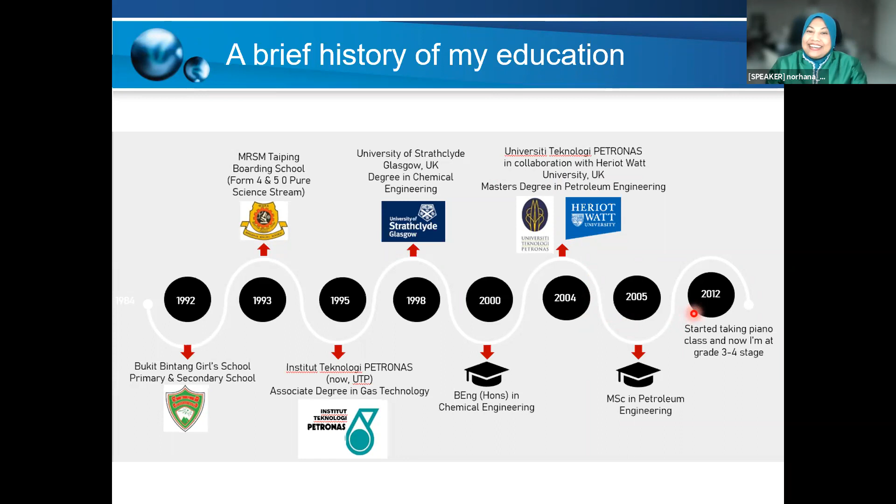And then half a year later, it was full-time at the campus itself. So I graduated with a master's in petroleum engineering from UTP. And since then, the only lesson that I'm taking right now is piano class. And just to let you know, I started in 2012 and I'm now in grade 3 or 4 stage.

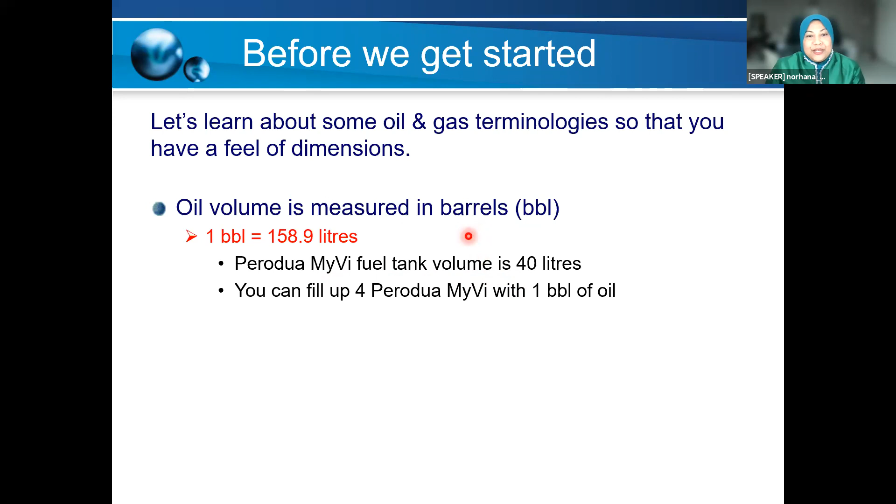So how much really is 1 barrel of oil? 1 barrel of oil is about 158.9 liters. So if you're familiar with the car Perodua Myvi, typically it has a fuel tank volume of about 40 liters. So with 1 barrel of oil, you can actually fill up 4 Perodua Myvis. Yeah. So what about gas?

Okay, gas volume is measured in standard cubic feet. And 1 standard cubic foot is about 28.3 liters. So if you know, in Kuala Lumpur we typically have a 60-liter natural gas vehicle tank, or NGV tank. So you can fill up 1 taxi with 2 standard cubic feet of gas.

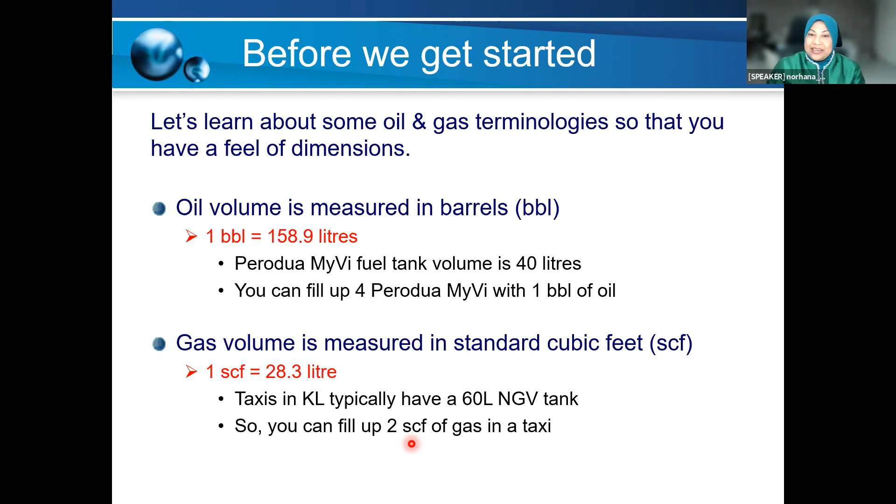So that's what it feels like to have 1 barrel of oil and 1 standard cubic feet of gas, right? So now that you know what barrels and standard cubic feet are in oil and gas world, I'm gonna now move into the topic of introduction to petroleum engineering and its sub-disciplines.

I have shared with you life as petroleum engineers, and I would like to share with you some challenges in oil and gas industry. So bear with me over the next 20 minutes or so. I'll walk you through all the slides. To make things more interesting, I've prepared or sourced a video that speaks about the oil and gas industry. So I'm gonna play this video now. Let's see if it works.

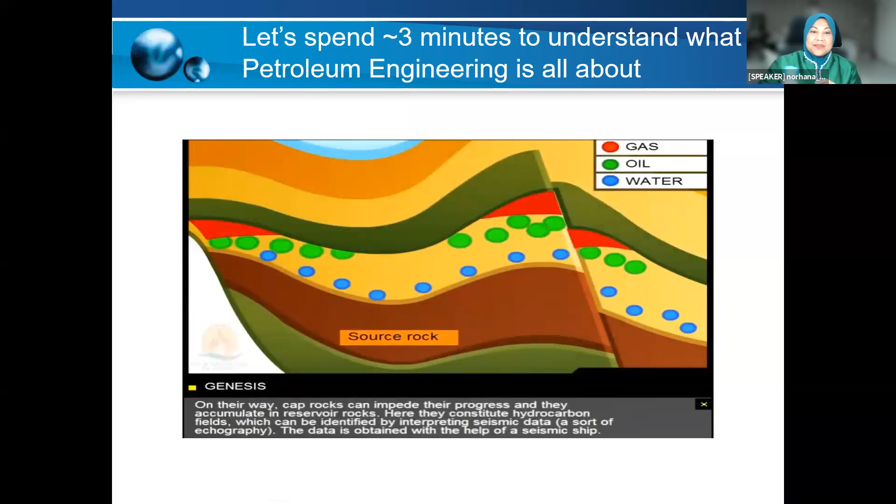Oil and gas are generated from a source rock, organic matter buried in the depths of the earth. Once formed, they climb back towards the surface. On their way, cap rocks can impede their progress, and they accumulate in reservoir rocks. Here, they constitute hydrocarbon fields, which can be identified by interpreting seismic data, a sort of echography. The data is obtained with the help of a seismic ship. To confirm the interpretations of seismic data, two types of drilling gear exist. Each is adapted to a range of depth of water down to more than 2,500 meters. The platform seen here is a semi-submersible which floats and retains its stabilized position by means of anchors fixed on the seabed.

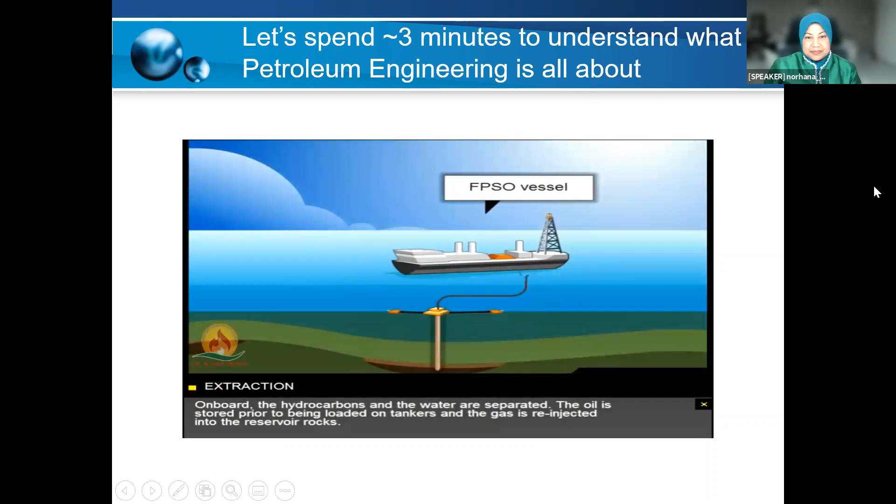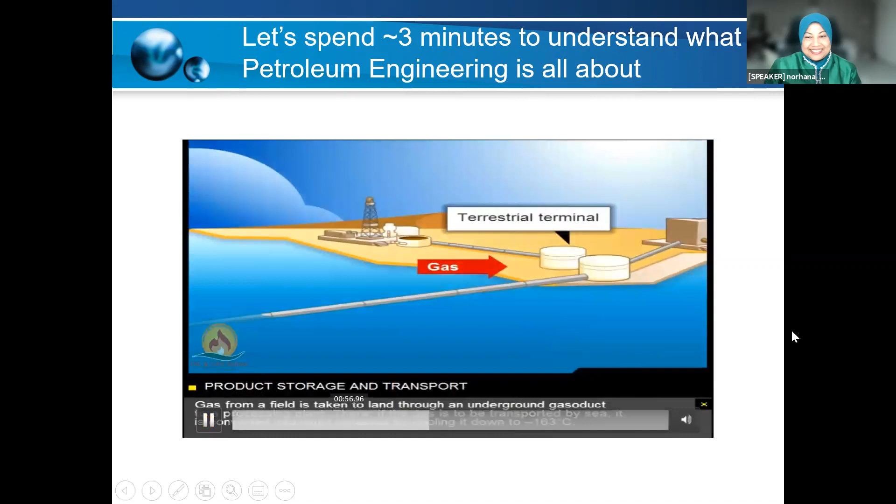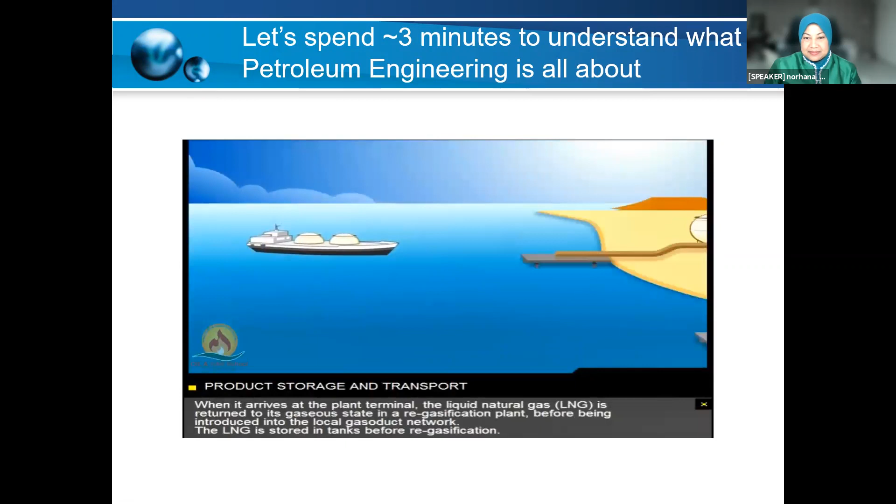Platforms at sea are used not only for drilling, but also for the production of hydrocarbons. This production consists of the separation of oil, gas, and water before the oil and gas is taken by pipeline towards a mainland terminal. Where it's impossible or too expensive to link the field to the coast by a pipeline, an FPSO ship is used, floating production storage and offloading barge. On board, the hydrocarbons and the water are separated. The oil is stored prior to being loaded on tankers, and the gas is re-injected into the reservoir rocks. Gas from a field is taken to land through an underground gasoduct to a processing plant. There, if the gas is to be transported by sea, it's converted into liquid, obtained by cooling it down to minus 163 degrees Celsius. When it arrives at the plant terminal, the liquid natural gas, LNG, is returned to its gaseous state in a regasification plant before being introduced into the local gasoduct network. The LNG is stored in tanks before regasification.

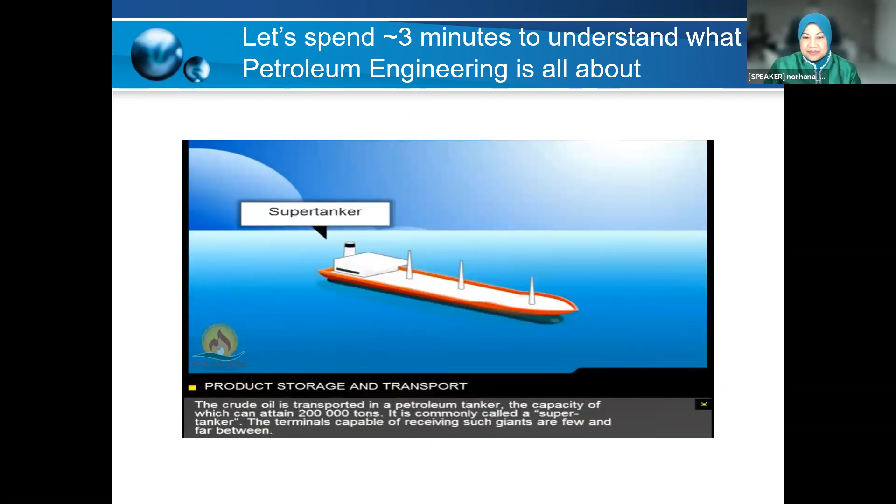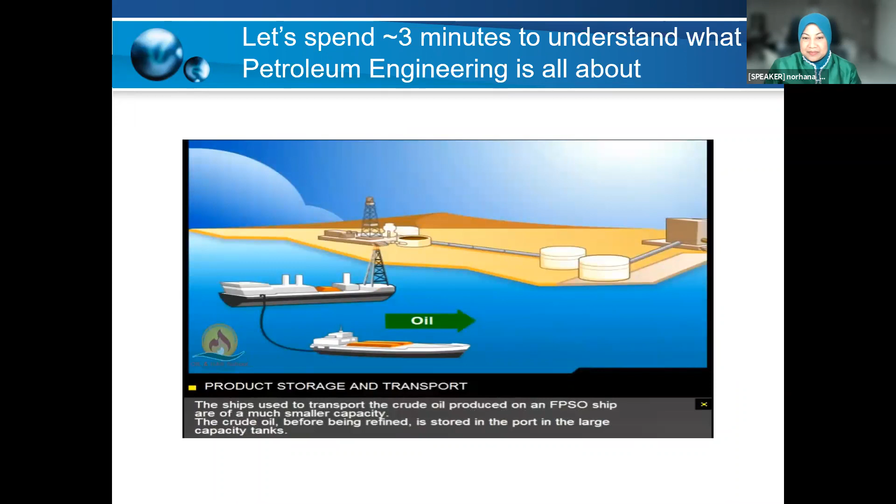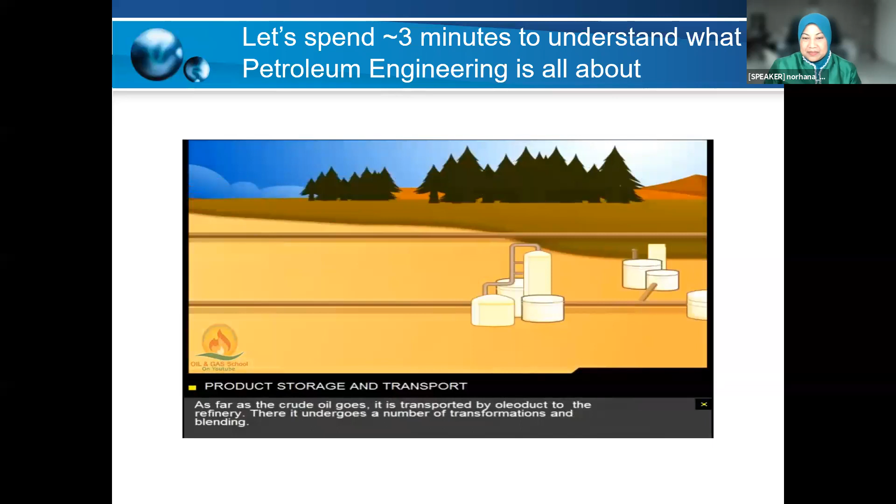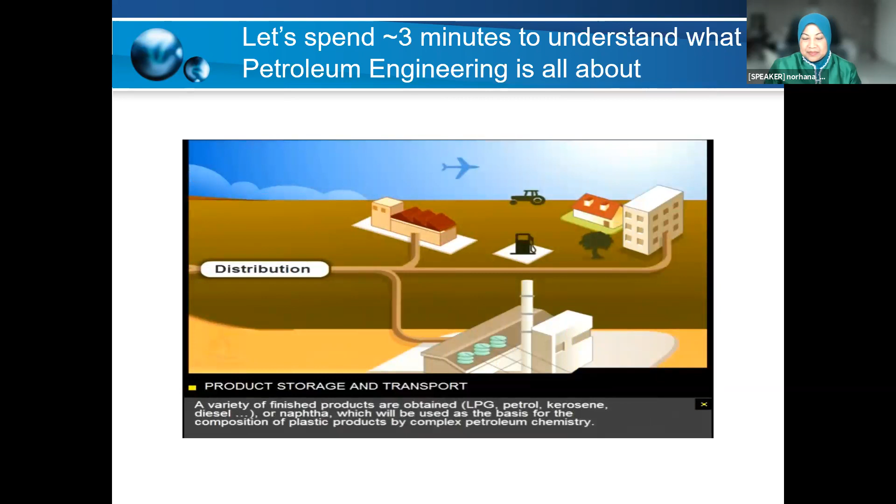The crude oil is transported in a petroleum tanker, the capacity of which can attain 200,000 tons. It's commonly called a supertanker. The terminals capable of receiving such giants are few and far between. The ships used to transport the crude oil produced on an FPSO ship are of a much smaller capacity. The crude oil, before being refined, is stored in the port in large capacity tanks. The natural gas is preserved in reservoirs, artificial or natural. It's ready to be injected by pumping into the gasoduct network for industrial and domestic use, or as fuel in power generating stations. As far as the crude oil goes, it's transported by oleoduct to the refinery. There it undergoes a number of transformations and blending. A variety of finished products are obtained: LPG, petrol, kerosene, diesel, or naphtha, which will be used as the basis for the composition of plastic product. Two types of drilling gear exist.

So sometimes what we get is just gas, and sometimes what we get is a combination of gas and oil presence. Sometimes gas are captured in tight gas sand. And in the shallower surface in some parts of the world, we have gas in what we call coal, and they cover an extensive area, and we call them coal bed methane, particularly because they have high concentration of methane gas. Right.

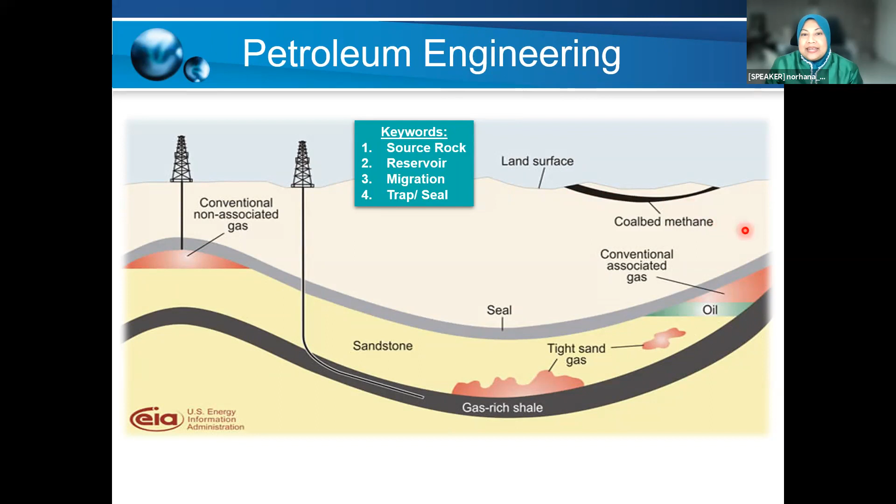So typically, as petroleum engineers, we are involved in what we call the field life of a petroleum engineering world. So we can start the activity with acquisition, exploration, development, production, as well as abandonment. We can be onshore and we can also be offshore. And offshore, we can work at shallow water conditions. We can work in deep water conditions. And we also can work in ultra deep water conditions.

Right. Of course, with increasing levels of water depth, the degree of technical complexity also increases. More and more advanced technologies are being used for us to explore and exploit the oil and gas offshore. So typically in shallow waters, we use a fixed platform or a compliant tower. So in the Malaysian environment, in our shallow waters, we typically have fixed platforms.

And in slightly deeper water, as we move out of the continental shelf towards the deepest part of the continent, we get varying types of rigs that we use. We have SeaStar, we have floating production systems. There are tension leg platforms. There are also subsea wellheads that we can connect to either one of these facilities. And we also have what we call a spar platform.

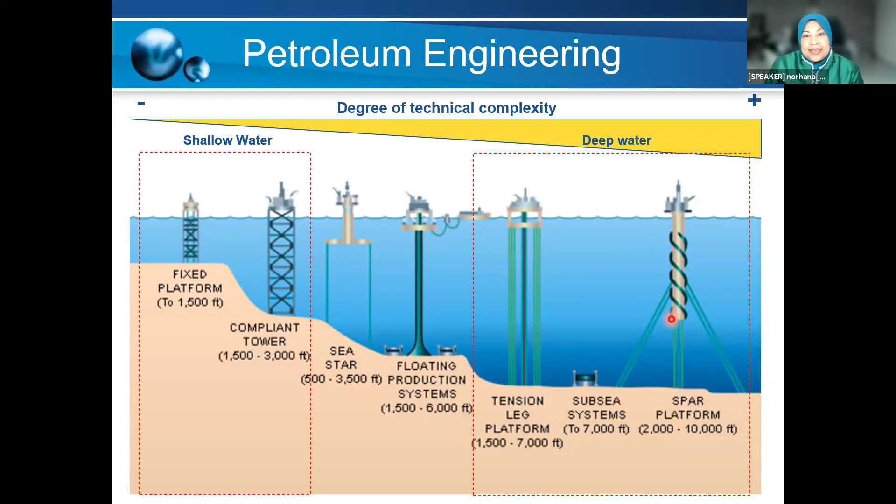Right, so for your information, there are many branches of petroleum engineering. So if you graduate with a petroleum engineering degree, you can be employed as a reservoir engineer, which I will talk about later. If you graduate with a PE degree, you can also be a production technologist. We also have petrophysics, and we also have drilling engineering, as well as petroleum economics.

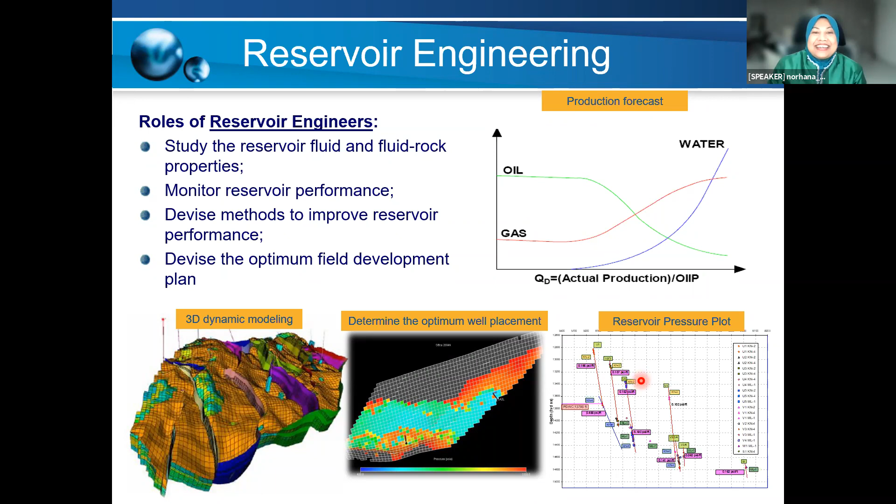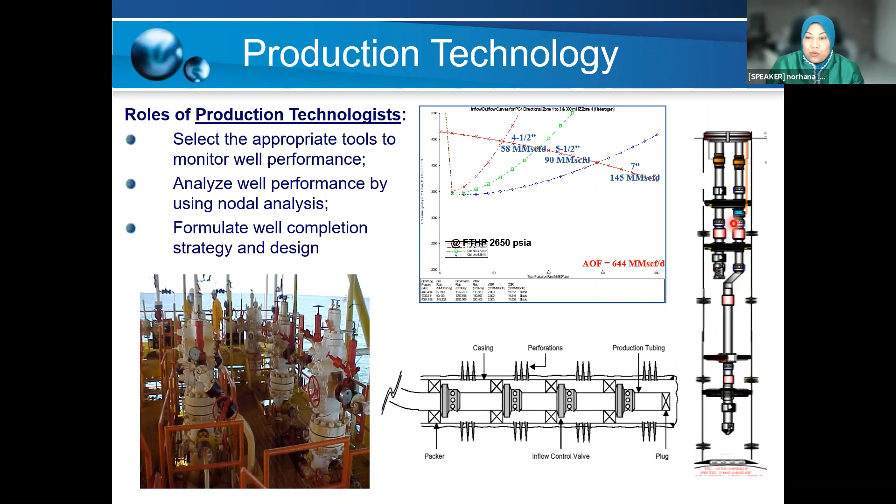So a production technologist will decide what type of equipment, what kind of perforations we're going to use, what kind of liquid we are going to produce, and how we manage them over time. So sometimes we are required to work in an integrated way.

So we do have integrated operations where we rely on satellites to transmit data from the drilling rig to our remote shore-based facilities. So it may be in the PETRONAS Twin Towers, or it may be anywhere we are operating in the world. Okay, and some of this data will need to be transmitted via private networks.

We use a lot of telecommunications provided by Telekom Malaysia through underground cables as well. So these are all key success factors in running any integrated operations very well. We do need this to transmit data. We do need to have well status monitoring.

So if we can map all of our oil and gas wells, we are able to tell how much oil each well is producing, how much water, how much gas we are having, and a typical reservoir engineer and production technologist combined will need to do day-to-day well production monitoring, and we do need to analyze how our wells are performing.

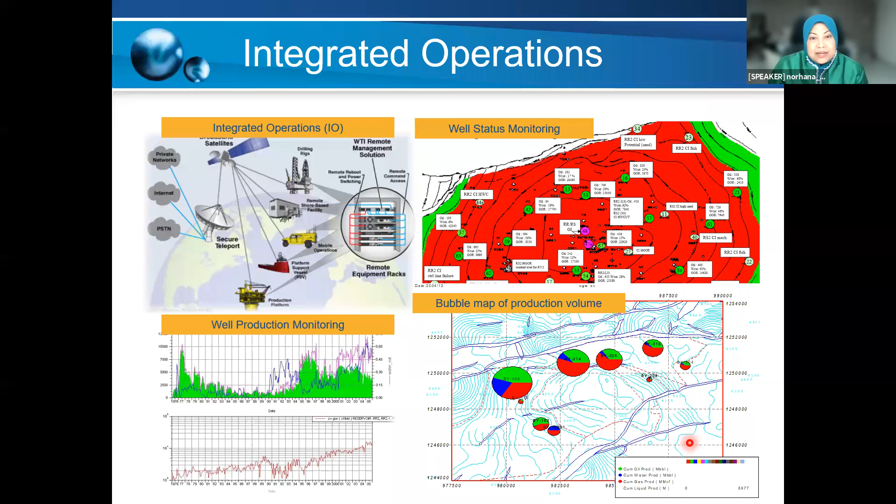Right, now I'm going to move to the next subdiscipline, which is petrophysics. If we are employed as petrophysicists, what we do is actually acquire data from the wells in order to study the reservoirs. So we also need to choose the appropriate tool and method of data acquisition. We identify the presence of oil and gas, and we also evaluate the properties of the reservoir.

So this really is a combination of good physics and sciences. So we also need to do some mathematical correlations if we are in petrophysics. So we look at the data about porosity. Porosity is the holes that we have inside a piece of rock, and also permeability. So permeability is the ease of fluid to flow inside a porous media.

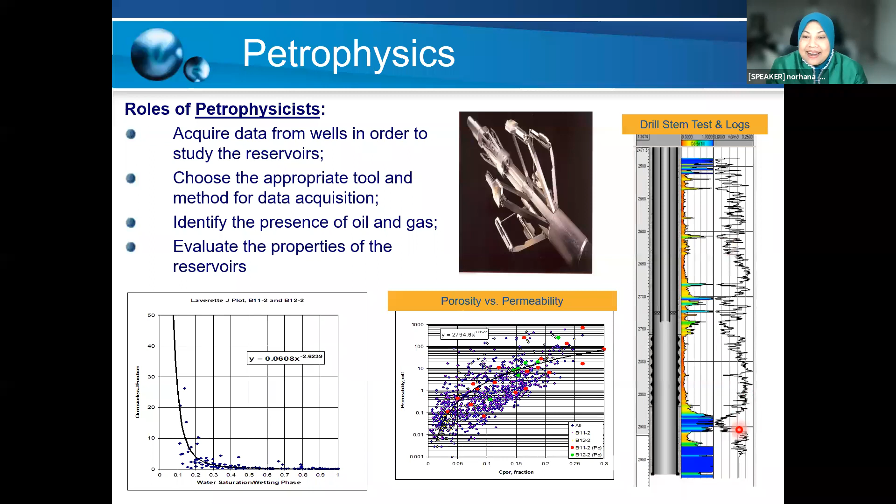Okay, and this is a typical electric signal response from a drill stem test. So it looks like, if you are a cardiologist, you read an ECG diagram. I think this is something similar. You look at the diagram and you interpret, what is this? What does this line mean? Are you okay? Do we have hydrocarbon presence, or do we have water, or do we have gas? The fluid will be characterized by the pattern of this electrical response.

Right, we also have drilling engineering. So if you like action, if you like the hard, physical, rough environment, I think drilling engineering would suit you. And what do drilling engineers do? They actually conduct efficient drilling. So all the pictures that you've seen before, the drilling rigs, that's where your work location would mainly be. So you would be planning a well design.

For example, in this picture, our semi-submersible drilling rig would probably be a few kilometers away, and your target could be 2 or 3 kilometers away from your drill center. And so you need to devise a drilling program, plan for it, and make sure you reach the target. And you use a lot of drilling equipment. So these are some pictures of our drilling tools. Some are made of diamonds, some are made of tungsten carbide, so these are all the drilling bits, we call them.

Okay, and we also need to plan and select what would be the most suitable rig. So depending on the water depth where we are located and also the power that we need in order to drill all the way to a very, very far location, you probably want to decide all of these before you do the drilling program and choose the appropriate tool for the job.

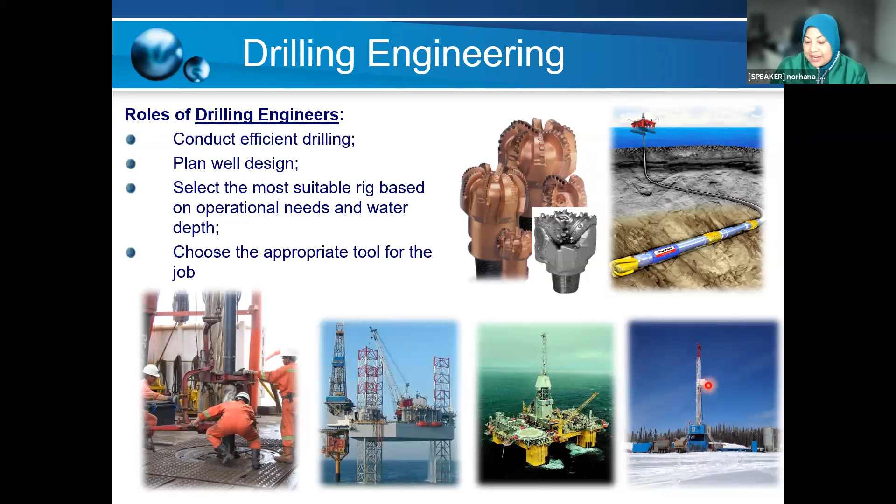Right. There's another branch of petroleum engineering, which is petroleum economics. So if we are a petroleum economist, we normally would conduct economic feasibility studies. We interpret contracts to develop cash models, and we also analyze project value. So this would interest you if you are strong in mathematics, if you like commercial subjects. This, I think, would be a good subdiscipline for you.

So we will typically learn or analyze what will be the net present value for a given project, given the sensitivity in the oil production, oil price, the capital expenditure or CAPEX, or operating expenditure or OPEX. And petroleum economics role is actually very important in advising the decision makers whether we will make money or not by the end of the project life.

So typically we will spend a lot of money. There is a big cash sink during the development phase. And as you start production, you will get more revenue, and you will see that at the end of the day, you probably also need to spend some money to abandon those wells that you have drilled.

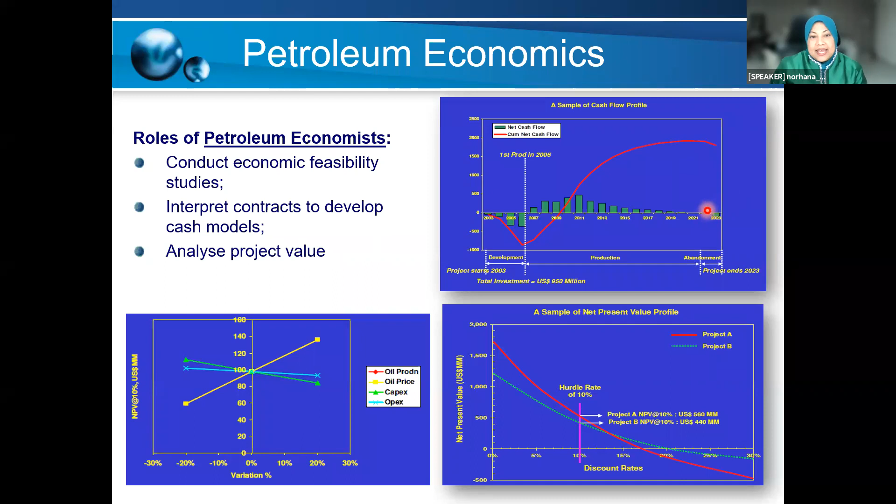Okay, right. So I've shown you pictures of life as petroleum engineers. Like I mentioned, it's quite interesting. It's not just about working offshore. Most petroleum engineers would work in an office environment, or they may work in the yards if you are in the contractor service. Sometimes you are also working in the production lab, like a research lab as well. So that is how diverse a petroleum engineering career may be.

Now let's talk about challenges in the oil and gas industry. So I'm mindful of the time now, it's 21:38.

Okay, so oil and gas is actually not always a glamorous business. It also comes with a lot of challenges. So as petroleum engineers, we typically struggle to make sure the organization that we work with can maintain a good tolerable cost profile. So the lower you can, the better. But it does not mean that the lowest option is the better. So there is really a trade-off between the cost that you're willing to spend and the reward that you will get out of spending the high cost.